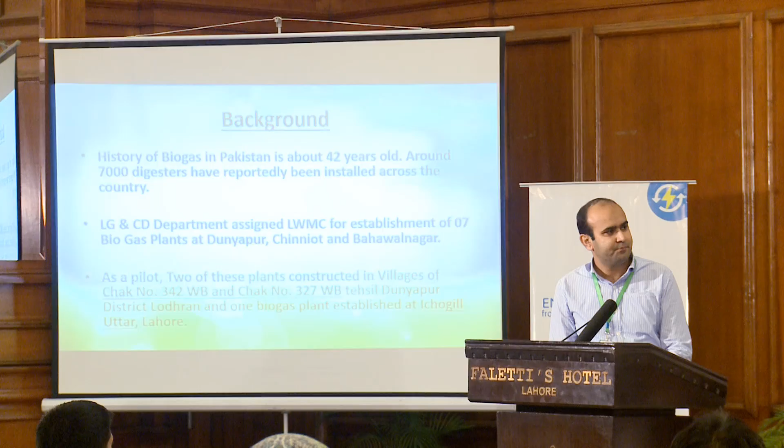This is the background of biomethanation. First of all, the history of biogas in Pakistan is about 42 years. In 1974, the government of Pakistan started to establish biogas plants in Pakistan, and more than 7,000 digesters were reportedly installed across the country, in which LGCD, Local Government and Community Development, assigned LWMC to establish 7 biogas plants in Lahore, Dunyapur, Chinniot, as well as Bahawalnagar. First, 2 biogas pilot plants were installed in villages 342 WB and 327 at Lodhran, and 1 at Ichogil Uttar. These biogas plants have a capacity of 200 cubic meters per day.

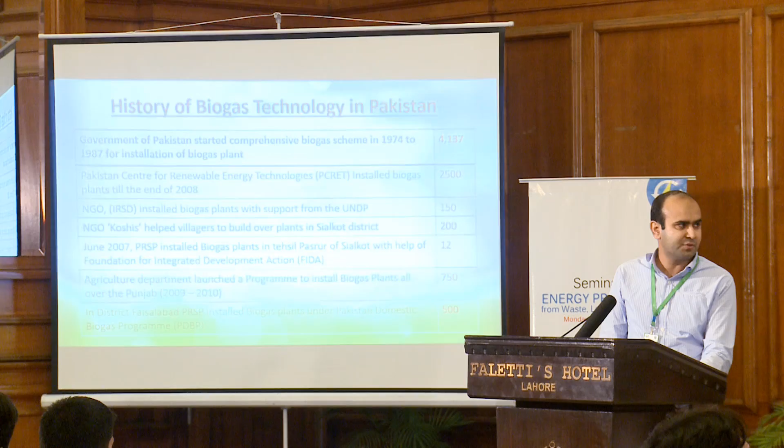This is the history of biogas technology in Pakistan. First, the government of Pakistan started comprehensive biogas programs, more than 4,000 plants from 1974 to 1987. Then different NGOs installed around 200 and 2,500 plants, and the United Nations Development Program installed 150 biogas plants, as well as 12 biogas plants in 2007. This history I collected from research on the history of biogas plants, United Nations Development Program survey reports, and feasibility studies of domestic biogas from 2007.

According to an LWMC survey, about 25% biodegradable material is available in landfill sites - biodegradable waste like kitchen waste, rotting fruits, vegetable peelings, fruits, animal waste, and plants. This biodegradable waste can be converted to useful energy instead of being thrown into disposal sites.

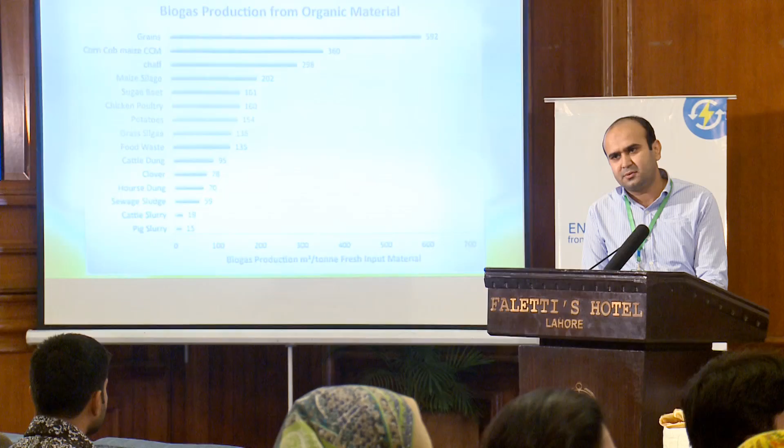This is the graph of biogas production from organic material. Normally, cattle slurry has a capacity of 19 cubic meters per ton of animal waste. If we deeply study it, grains and corn cob have a higher capacity for biogas production compared to cattle and pig slurries. This survey shows cattle slurry produces 19 cubic meters per ton, and it is the most feasible option for this environment in Pakistan, especially in Lahore.

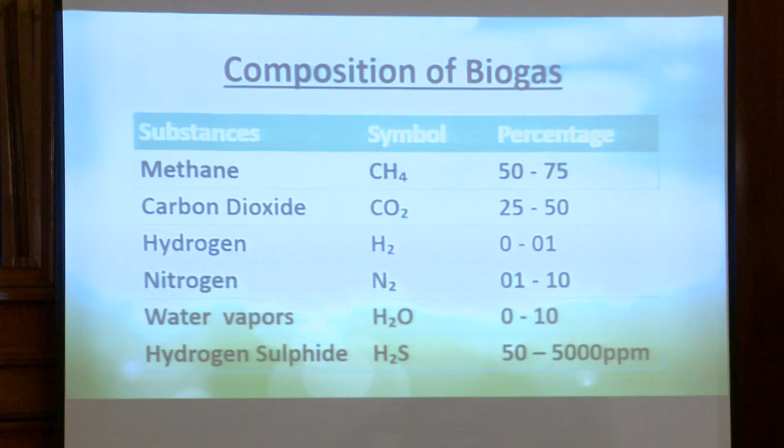In the biogas plants we established in Pakistan, especially in Ichogil as well as in Duniapur, we observed that the percentage of carbon dioxide is more, that's why improper combustion occurs, and due to the lack of methane production in this range, improper combustion is observed. That's why we want to progress to decrease the percentage of carbon dioxide which lies in this range. This is the characteristics of the biogas.

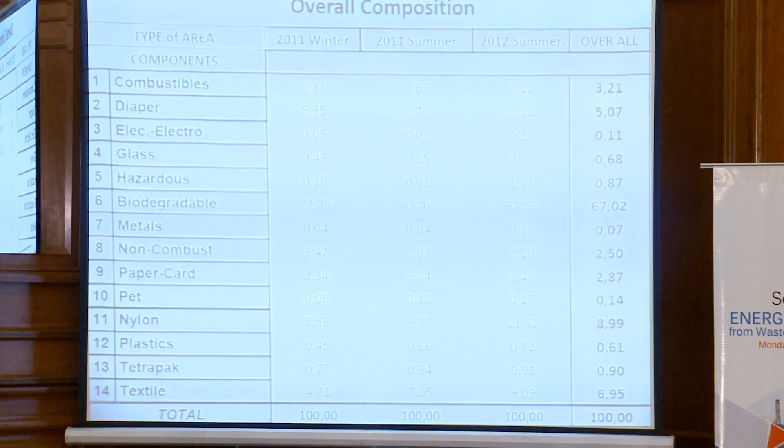These are some of the overall compositions. We have done 3 different studies at 3 different levels, and these are the percentages.

So this is the gas potential at Mahmood Booty. This was done by ISTAC, and here you can see the CH4, the methane percentage. This is around 55% of the total gases.

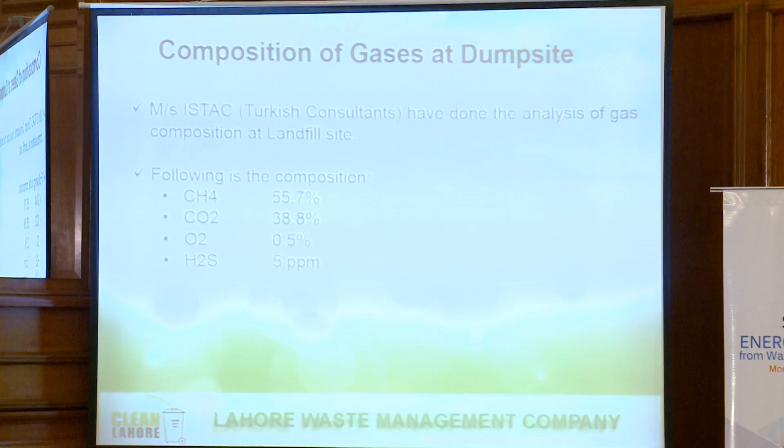So the composition: CH4 is about 55.7%, CO2 is about 38.8%, O2 is about 0.5%, and H2S is 5 ppm. This is the pictorial view of the analyzer which was brought by ISTAC at the site.

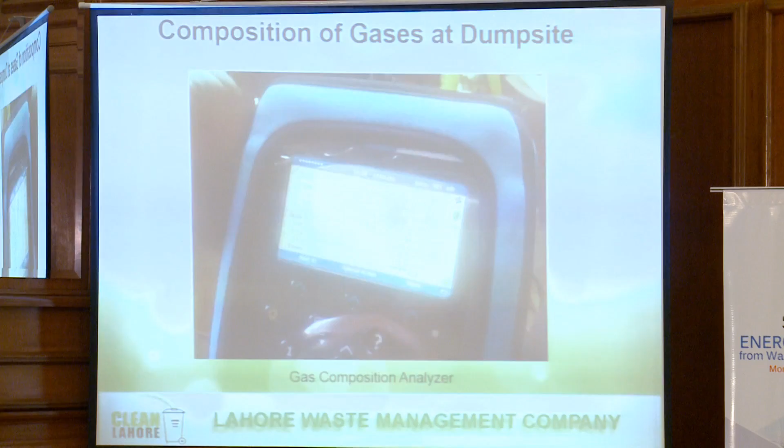So there are 2 different gas collection systems. As we have seen from the study, there is a gas potential in our Mahmood Booty site. So we are going to do the gas collection and installation of gas vents at Mahmood Booti. There are 2 different types: one is a vertical gas vent system, and the other is the horizontal gas vent system.

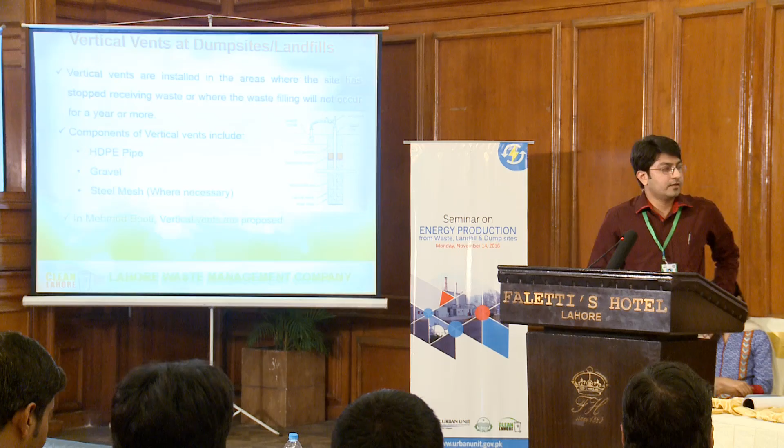The vertical gas vents are installed in areas mostly where the site has stopped receiving waste, or where waste filling will not occur for a year or more. There are different components of this vertical gas vents: one is the HDPE pipe, next is the gravel, and then the steel mesh, which is where necessary. In Mahmood Booti, the vertical gas vents are proposed.

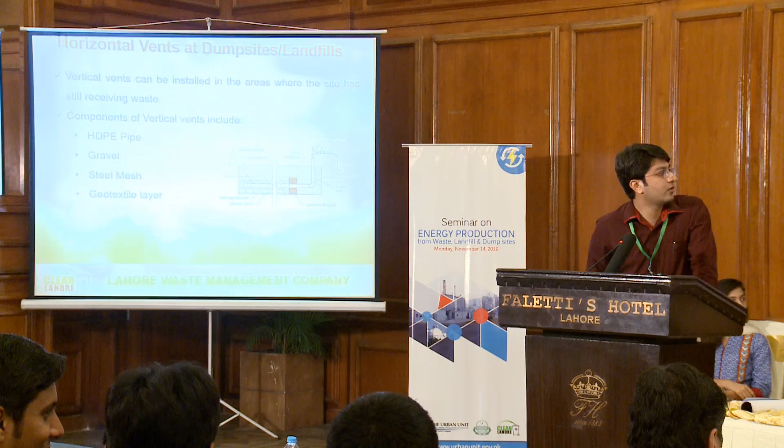Horizontal gas vents are installed in areas where the site is still receiving waste. Their components are HDPE pipe, gravel, steel mesh, and there will be a geotextile layer as well. This is the pictorial view of installation of gas vents at Mahmood Booti.

So what is the way forward? The picture shows what is before the rehabilitation work and what we will be expecting after the rehabilitation completion. Thank you very much.

Turkey has achieved great success in developing indigenous technological solutions for waste management. Turkey has not only developed gas extraction and energy production facilities at wild dump sites, but also established highly sophisticated dry digestion and gasification systems for waste management.

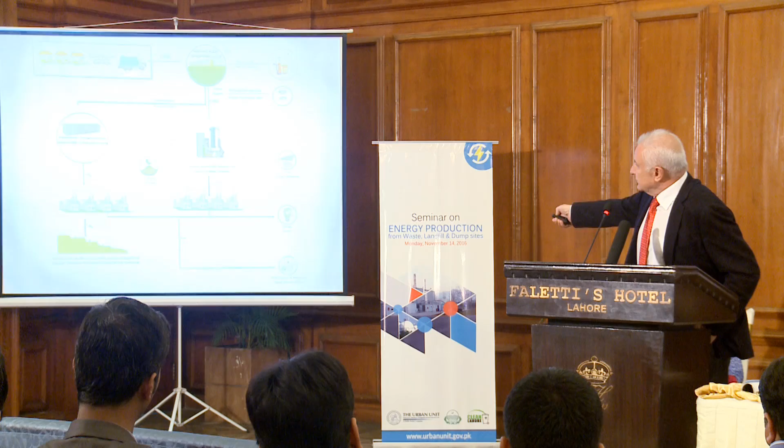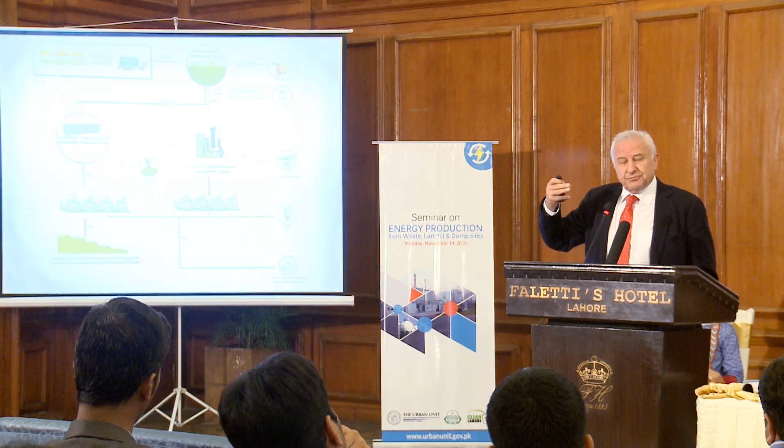Now let's come to waste, municipal waste. I have already told you that from the existing landfill, we can rehabilitate and extract gas and produce energy. After the material is transported, we can establish the sorting plants ourselves, but this can be done by many other companies. What is different is, since we are dealing with the waste ourselves, we know how strong the machinery needs to be. We have more practice than other producers of such machines.

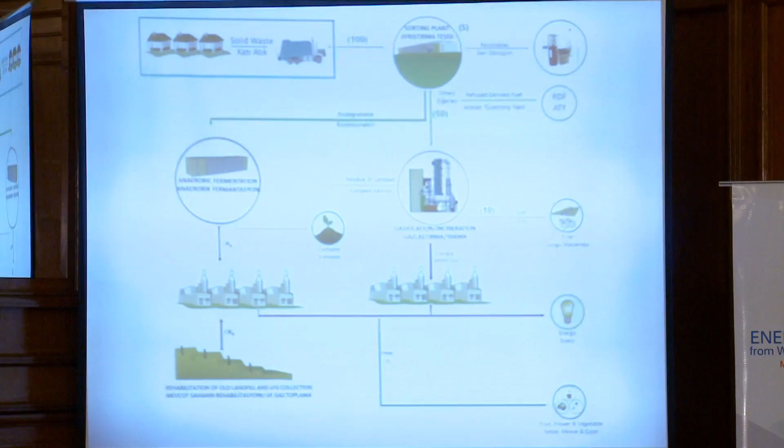From this, when we sort, we first try to get the degradable organics. Here the problem starts for mixed waste, because in degradable organics you have approximately 20% of other material you cannot prevent, since it is mixed collected—debris, stones, sands, even steel, small plastics, etc. It is not easy to establish a fermentation system with 20% other materials, and we have succeeded with this. You will see many of our plants, which are unique from this specialty, plus from the capacity point of view.

We use dry systems of 4,000 tons in each tunnel. This is the biggest biologically that can be produced in the world. So we can do this. At the end, what comes out, as other speakers mentioned, is methane gas—you can produce electricity—and compost, which you can use again in agriculture. If not, there are other solutions in our system; we don't leave anything unsolved. If you cannot use the compost for one reason or another, we have another solution: we can dry it and use this as the raw material for our thermal solution.

So after the sorting, the first thing comes out, then the second thing comes out, and if anything is left from the scavengers, we can take them out and pack them and send it to the related plants. Then if you want to produce RDF, you cannot really trust all your system to production of cement.

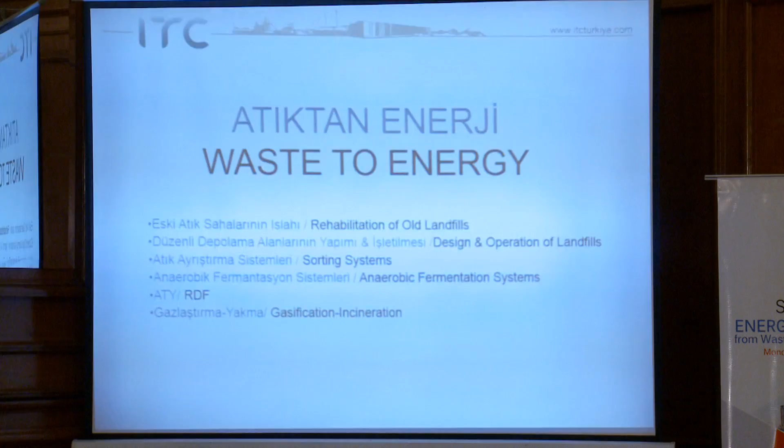Okay, let's go ahead. I don't want to repeat many things. Let's go ahead. Next, please. I mean, our friends have already talked about this, but let's go.

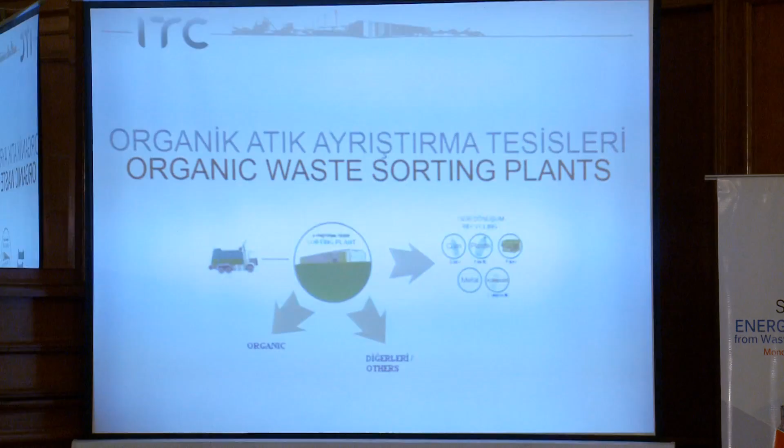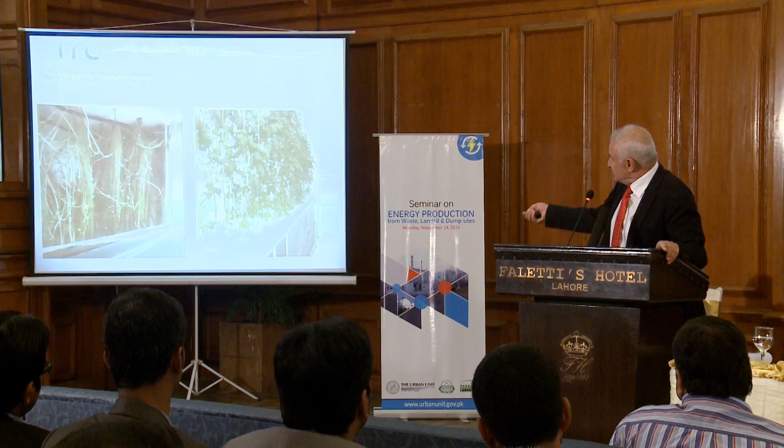Next. I told you about greenhouses, so you will see some applications. It's good, so we are selling these tomatoes. What is good is that even the children, when they come and see these tomatoes, they understand that we are using the excess heat from the waste, from the electricity production, plus we are using the excess carbon dioxide which plants need. Let's come back a little bit. With this, together with some water and some other material, we are producing tomatoes. And all these leaves and whatever green material comes out, it goes back again to anaerobic digestion to become electricity. So they can see the cycle. Okay, next.

We can produce strawberries 4 times more per square meter because of our different technique.

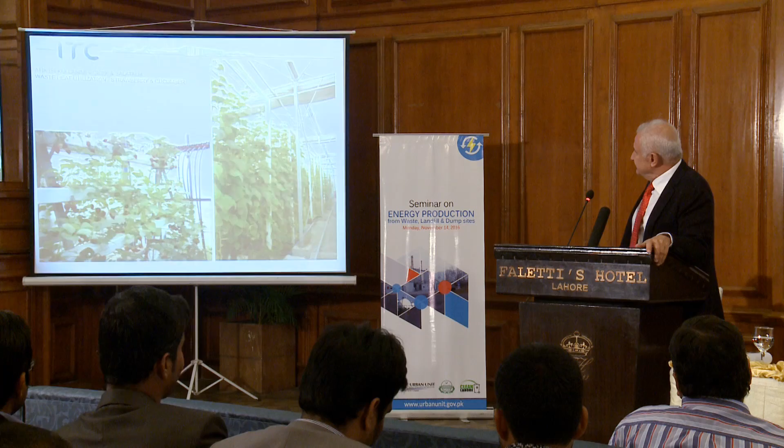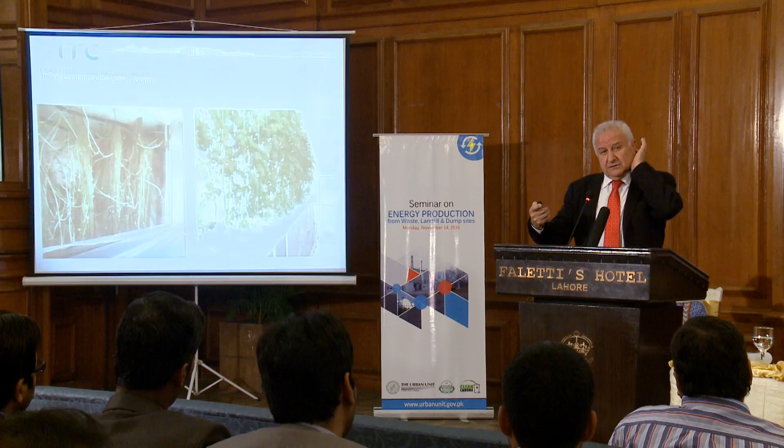Now there's another theme, because our company is a technological research and development oriented company. So whenever we go into a subject, we go deeper. For example, in this production of potatoes, we are using hydroponic systems. Usually when you get one small potato to use as seed, you have to plant it and you get 6 to 8 new potatoes from one. We can get 30 to 100 from the same potato by these techniques. And we have enlarged them, it has been in industrial capacities now. So let's go ahead, I think that's the real potatoes now from our seed. I think that's good enough. So let's go to the second presentation.

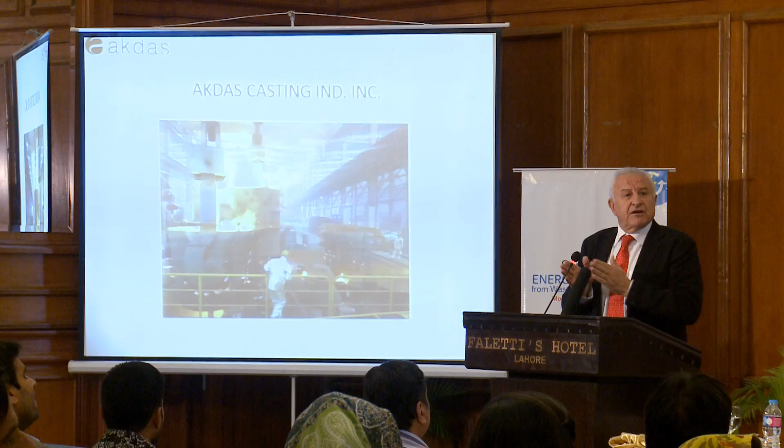When I tell you we built this, we designed this, what I mean is this: when we are designing a plant, we are starting from the design of the concept, design of the process. We design the process, how you can do this, the process itself. Then we design the plant. Then we design the machinery. Then we manufacture the machinery.

And we have seen that in Turkey, especially when you come to anaerobic digestion, gasification, these are high-tech technologies. Gasification plant is not different than refineries, it's more difficult than oil refineries, because oil is a constant material. Our material is not constant, it keeps changing, so our refinery is really more complex. So it's not easy to operate these units.

So in Turkey, what we do is we have the ability to finance and build the plants and operate them continuously for the municipalities. So that means our ability starts from process design to finance and build them and keep operating. And also new innovations are immediately added to these operations. This is where we stand.

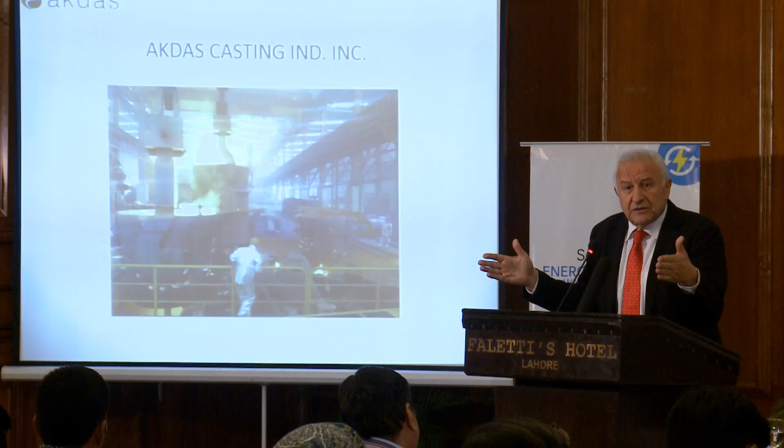Okay, then some people, later on I noticed, when I said we are building the machinery, but they see the plants. When we talk about gasification plant, it is 200 meters long, 34 meters high, and almost 100 meters for a twin unit width. It's a refinery. How you can build this? Where do you build this?

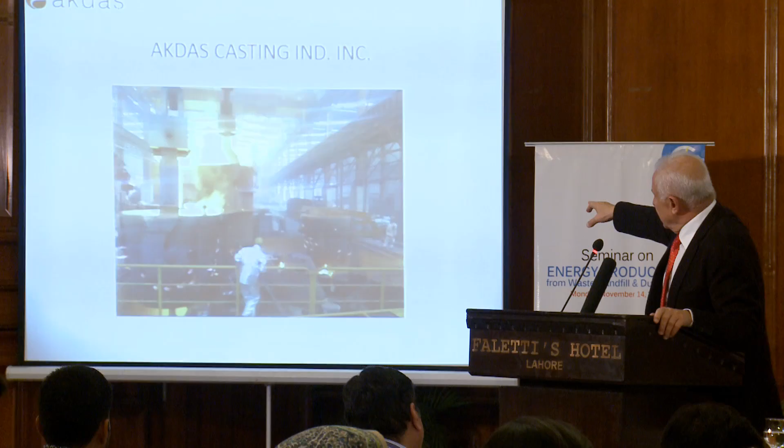I noticed this, so this is one of our sister companies. I put this also into our presentation. This company is a casting and machining factory plant in Turkey, in Ankara. Actually, we have 4 plants next to each other in the same organized site. We can cast up to 200 ton per piece casting, and we can machine this. We can lift this 200 ton piece, put it, actually 250 ton, put it on the machine, take out the 50 ton, leave 200 ton perhaps. This is our plant, you will see it now.

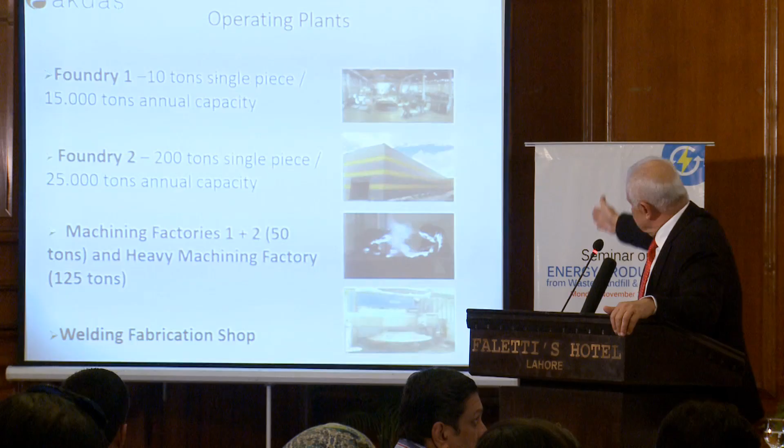We are selling 95% of our production to Europe. 25% we are selling machine parts to Sweden. The rest goes to Germany, France, Spain, United States, Canada, South Africa, and China.

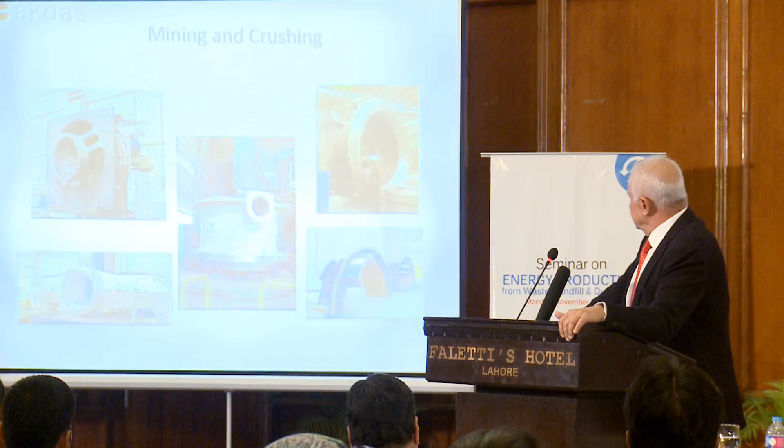Let's go ahead. This is in cement industries, we are working for them. In energy, we are working for them as well. Let's go ahead, go ahead. You can see some of the pieces.

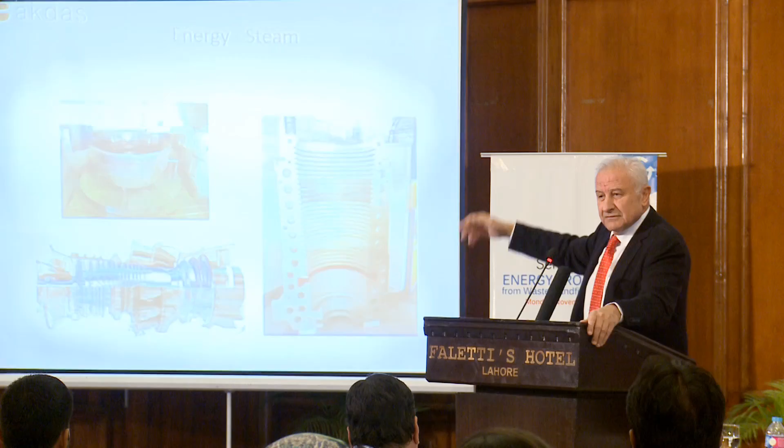Siemens casing for turbine, produced by us. So this is our machinery part. A film so you can see them all. I will still be here to tell you what is what.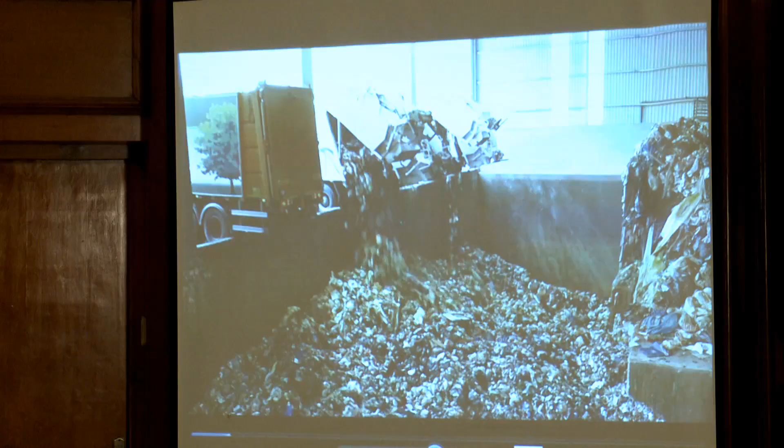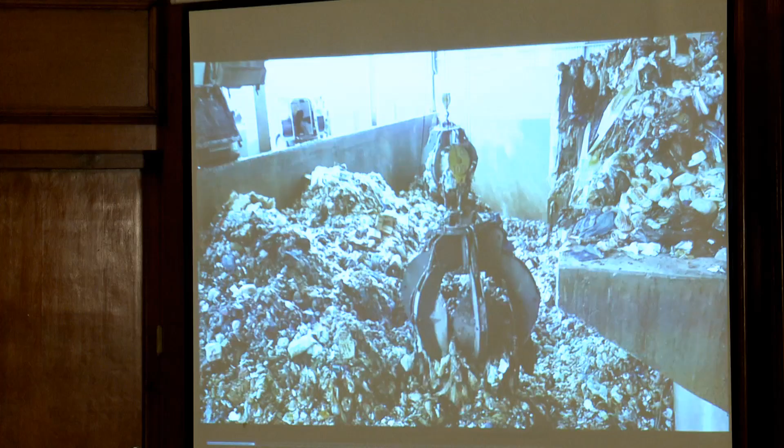You can see this is a 4,000 tons per day sorting plant, receiving the waste as it comes, day and night. This one is working 24 hours a day and it goes into a sorting system.

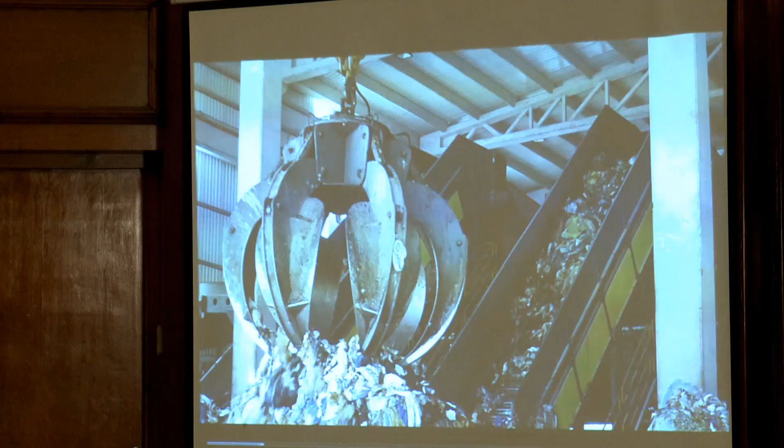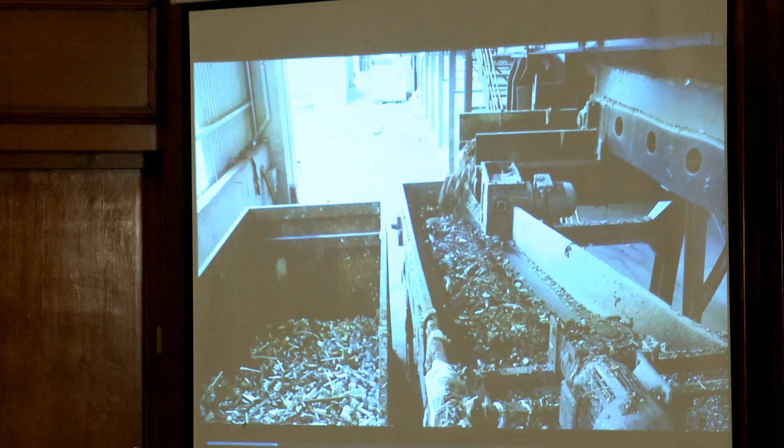We are using very special material here because it's not easy. The sorting started, bags are opened, and the first thing that comes out is organic, which can contain up to 20% debris, like this. A magnet collects the metal.

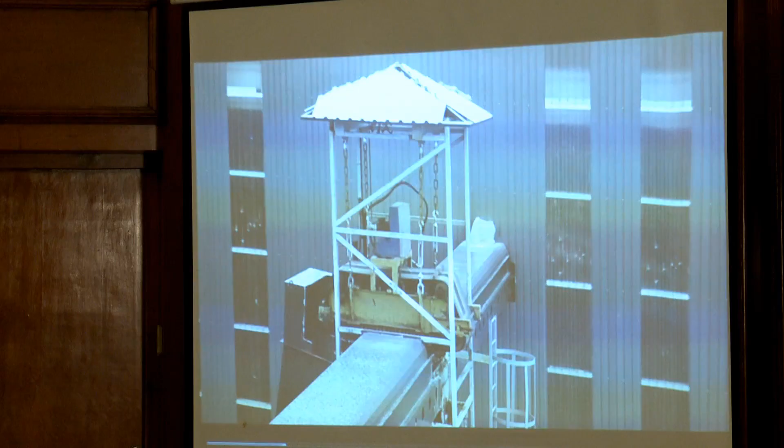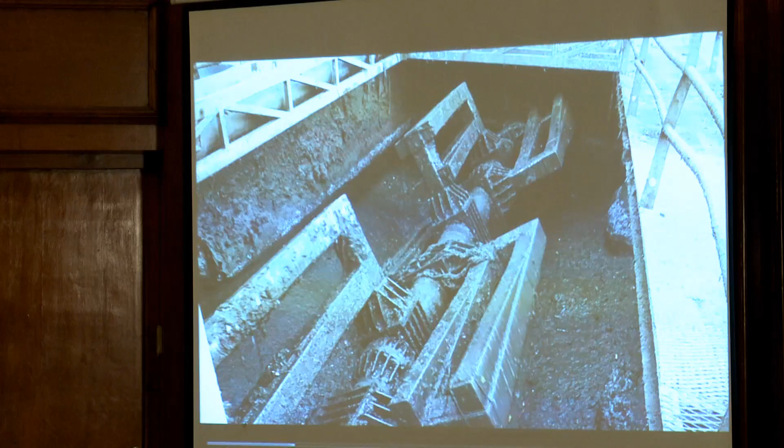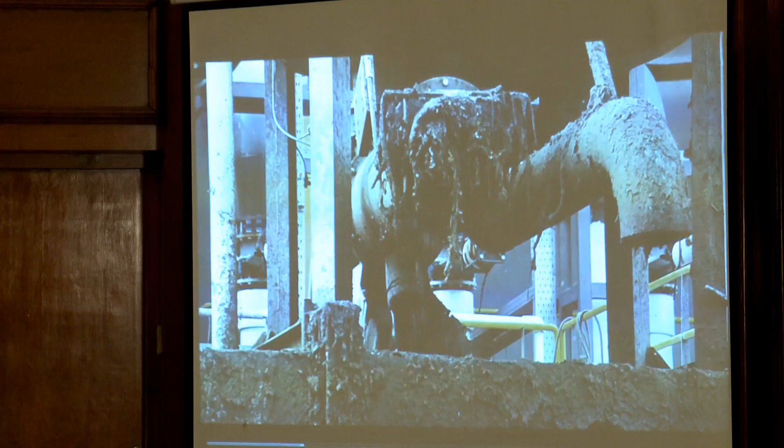It goes into premixing, then is pumped into different tunnels of anaerobic digestion. Each tunnel is 50 meters long. From the other side, compost is coming out, and dewatering is done there. From each of these tunnels, we are getting 20,000 cubic meters of gas.

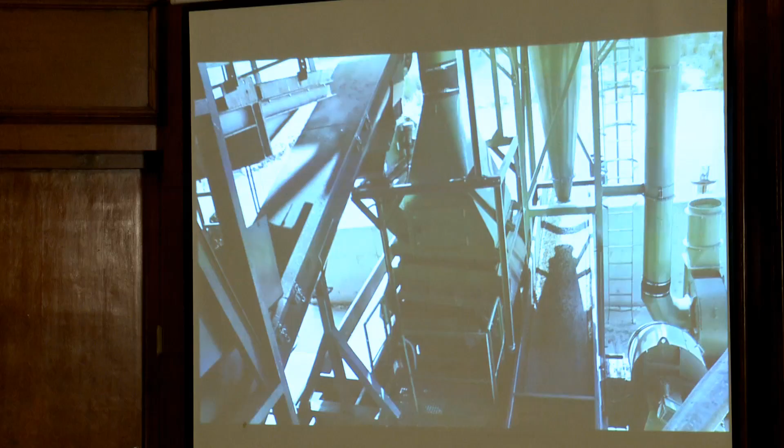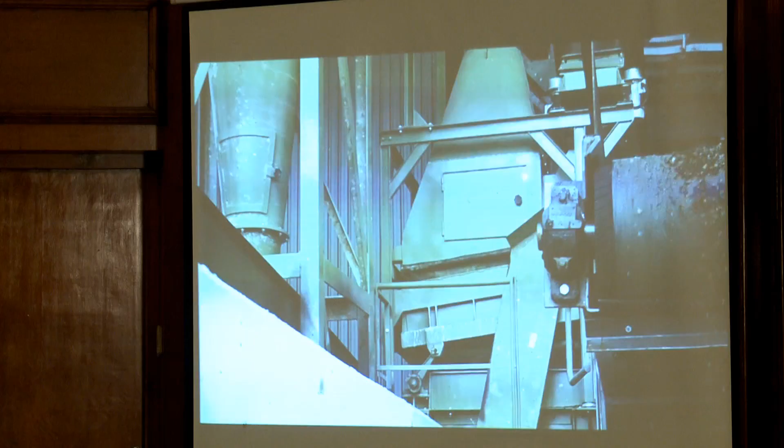Then compost comes to the compost plant for drying, and later for the separation of debris and other materials from the compost. You can see the compost on the left side and the debris on the right side.

And the software system to run this from the control office - this software is prepared in-house. They see the factories in a different office; they just watch the operation run by the computer, and wherever necessary, they touch it.

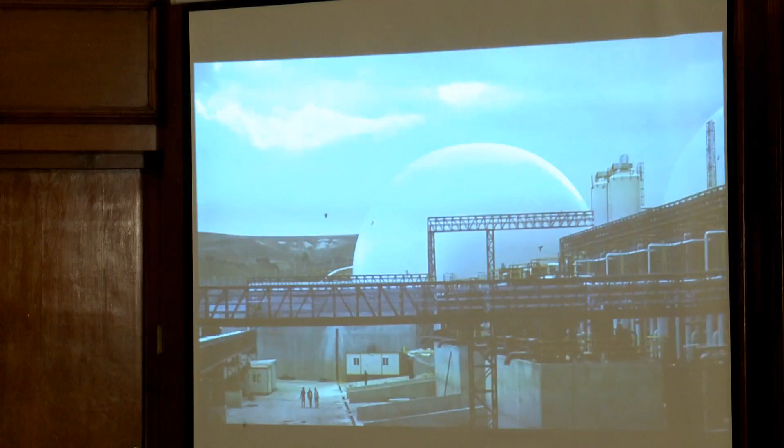The gas is coming from the anaerobic digestion. It is cleaned from hydrogen sulfide, stored, and electricity is produced and given to the main grid.

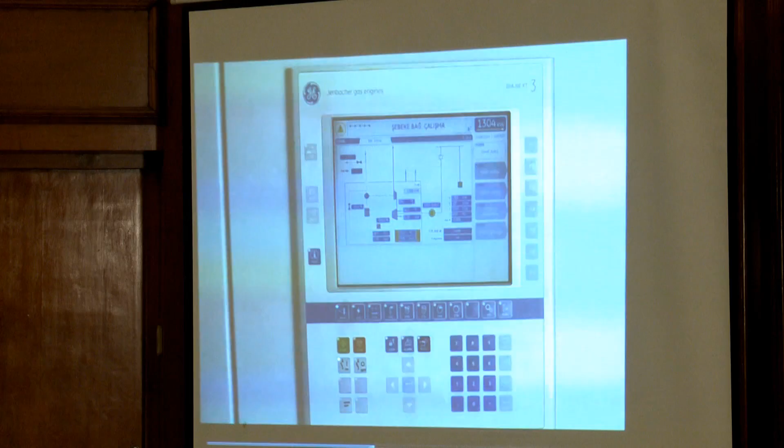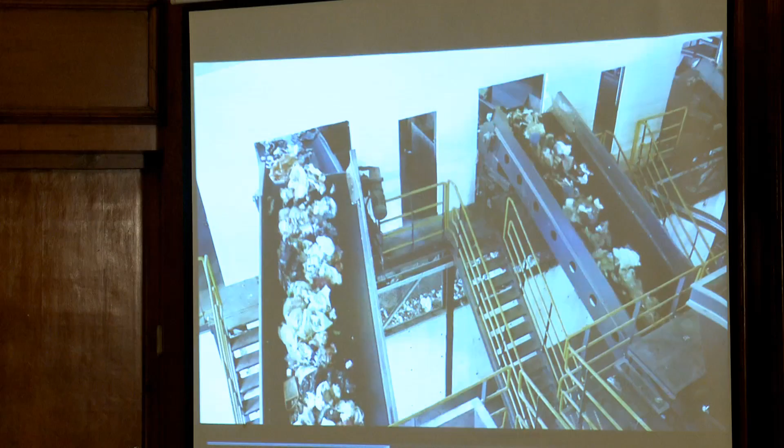We come back now. Organic part is taken out, the other part is coming out - you can see it's more dry now. There is some plastic, whatever is left, so we put a few men rather than an automated system. We don't need that because there is almost nothing left.

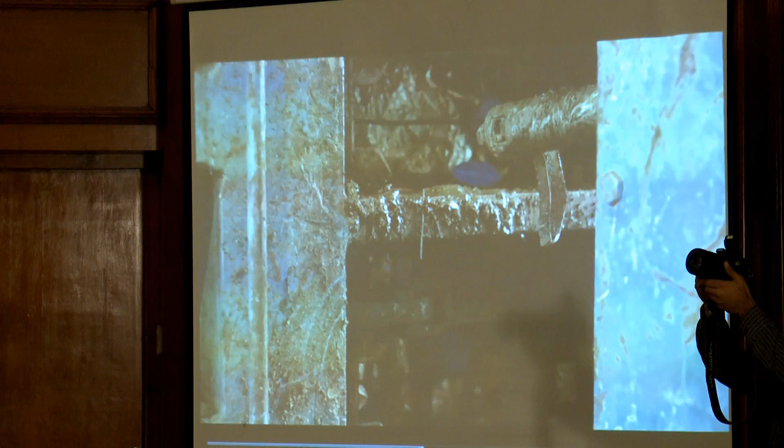You see, it looks like too much, but percentage-wise it's actually nothing. The cost does not even cover the revenue, or revenue does not cover the cost. It's automatically packed.

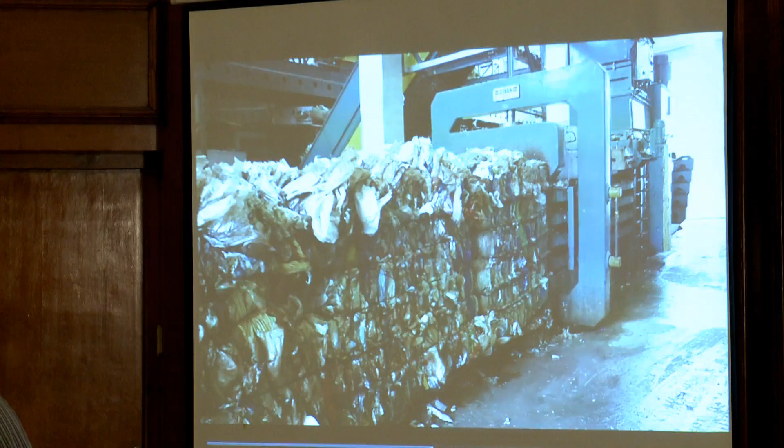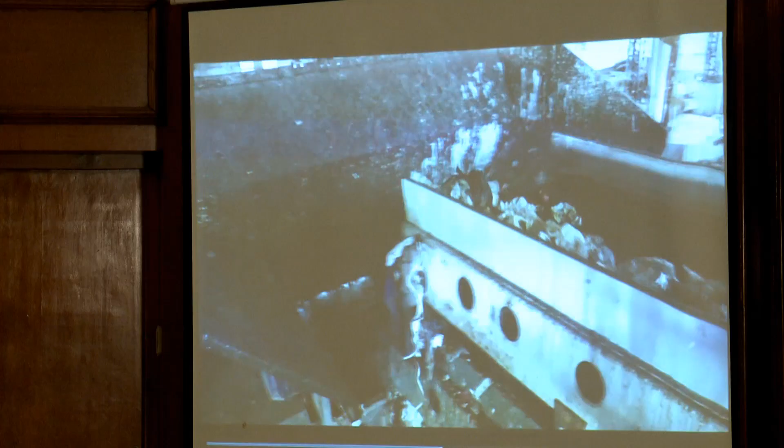Then the material is still flowing. Metals are taken by the magnets. This time, some of the material is diverted to production of RDF.

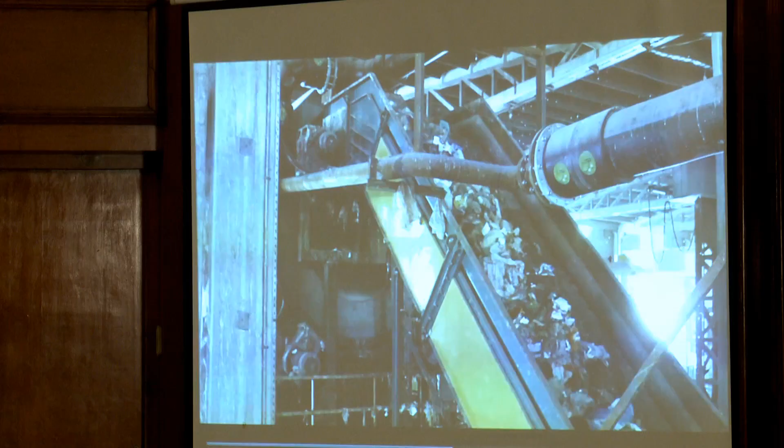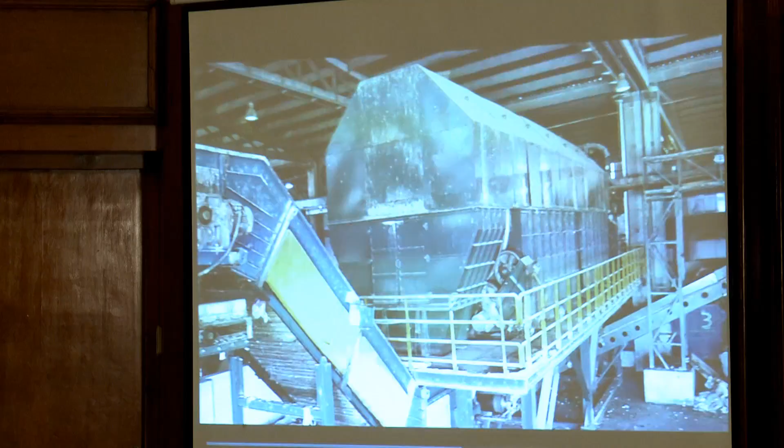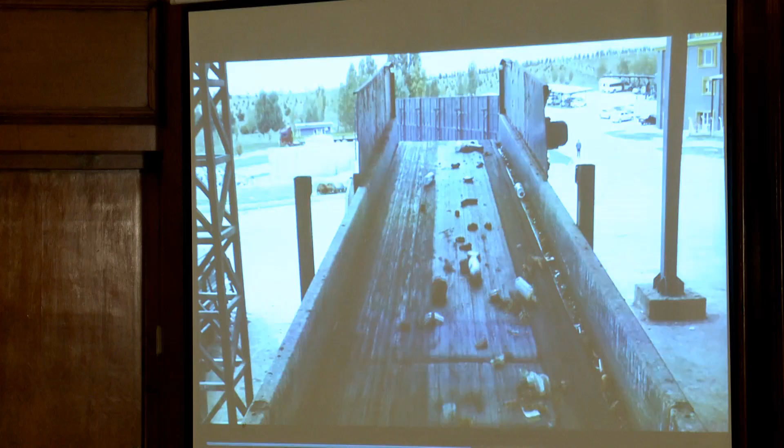The metal is crushed more, and then it goes into another phase of screening. Some parts will be taken out, but this will go into, again, the thermal unit, gasification. Nothing will be left out.

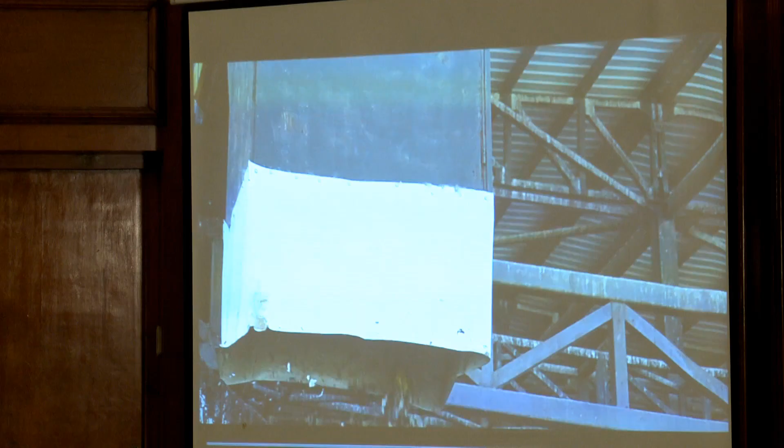This is the cement RDF. It goes directly into a truck, gets squeezed, and goes to the cement factory. You can see.

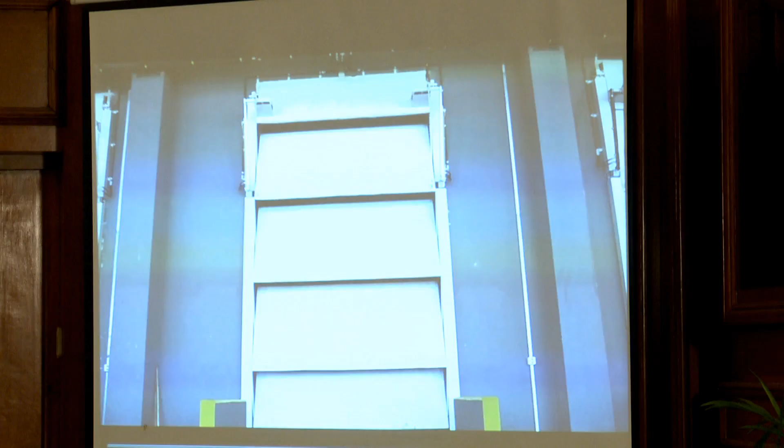Then, whatever is left from compost and RDF production, and the rest of the material coming from the sorting plant, goes into gasification, which is again built by us. In gasification you don't see anything - you just see the material taken from the bunker and put in through a hole. Then what you see is only the ash coming out.

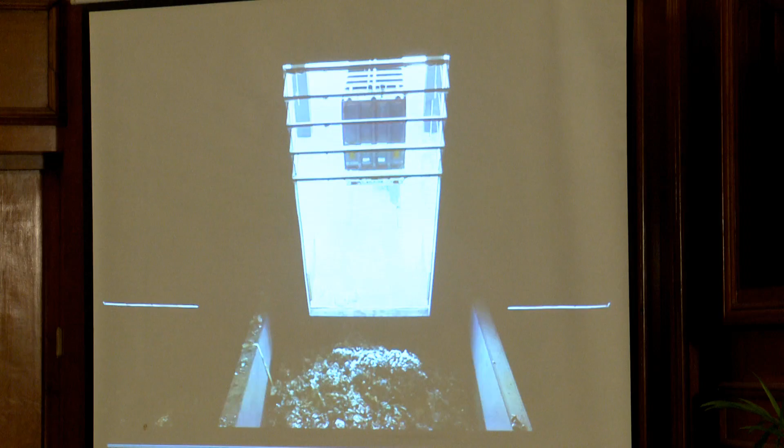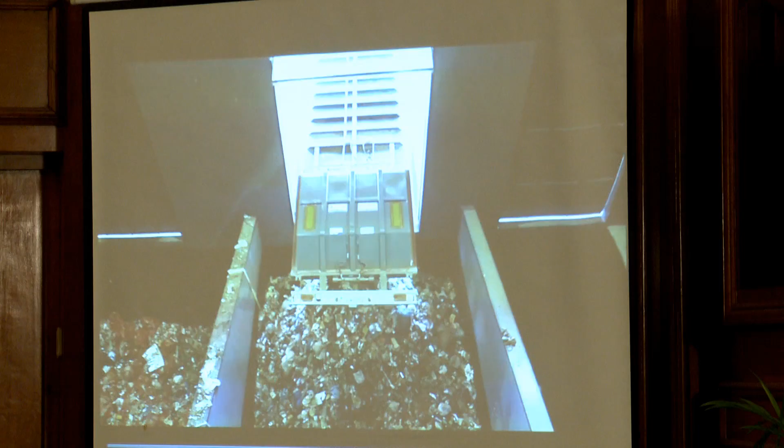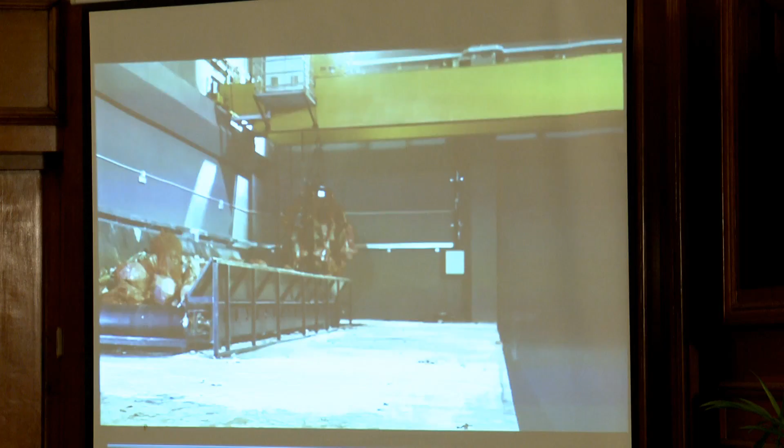This plant is running theoretically by 3 people. One is playing with the joystick, the other 2 are watching the computer screens. This is again completely designed and built in-house, and the software is again done in-house by our people.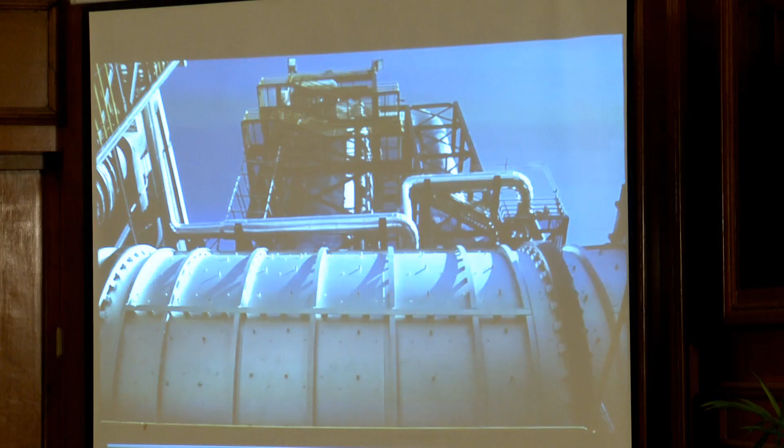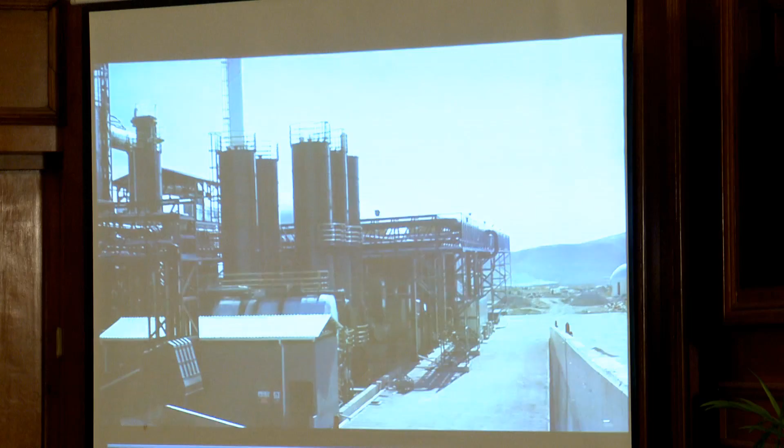Ash is coming out - you can see how little space is left for ash. Of course, when we talk about this thermal unit, 3/4 or 2/3 of the plant is cleaning the gas coming out of the gasification or thermal units. And from the heat or syngas obtained, we produce electricity.

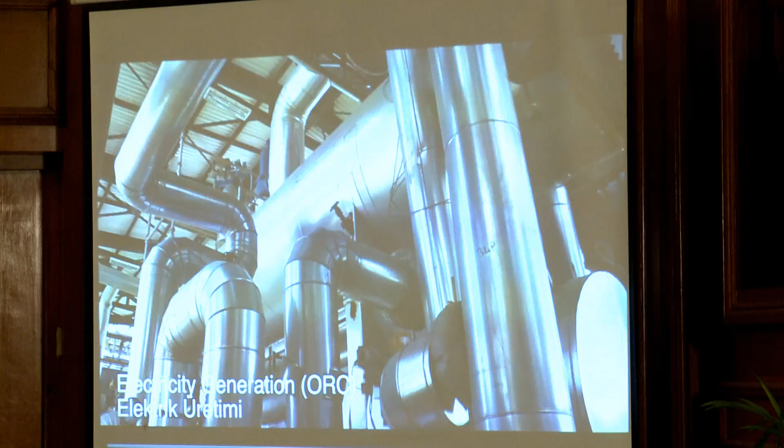The electricity production is done by organic Rankine cycle, and the production of the full electricity system, including the turbine, is done by our company. For the turbine part, we are working together with an Italian solution partner. All the electrical cabinets, software, etc. are all designed, produced and built in our factory, in our plant.

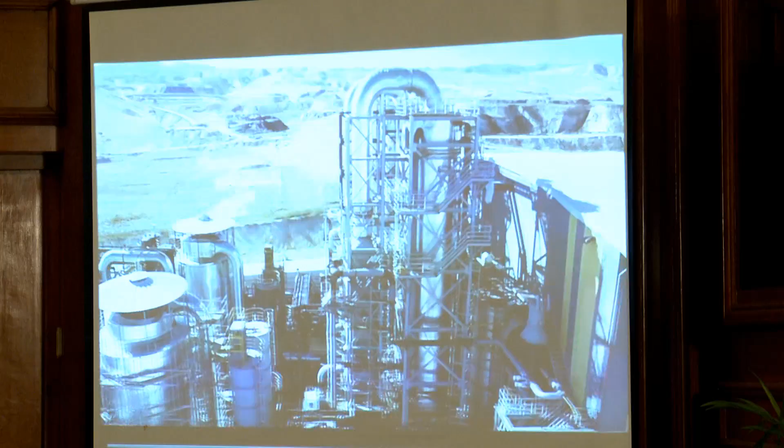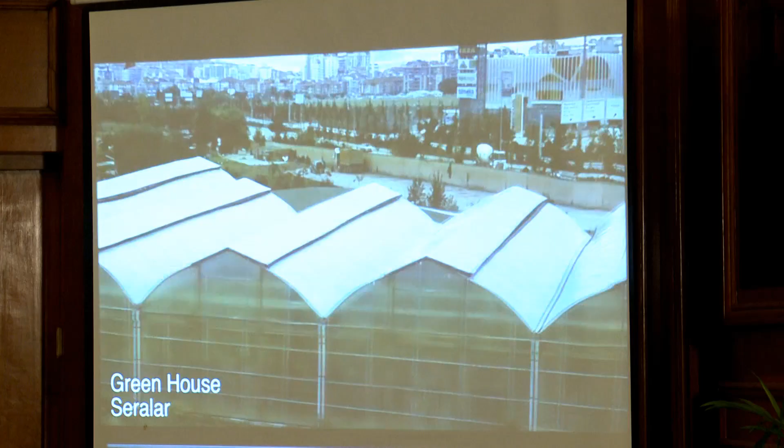Okay, I think we can stop here.